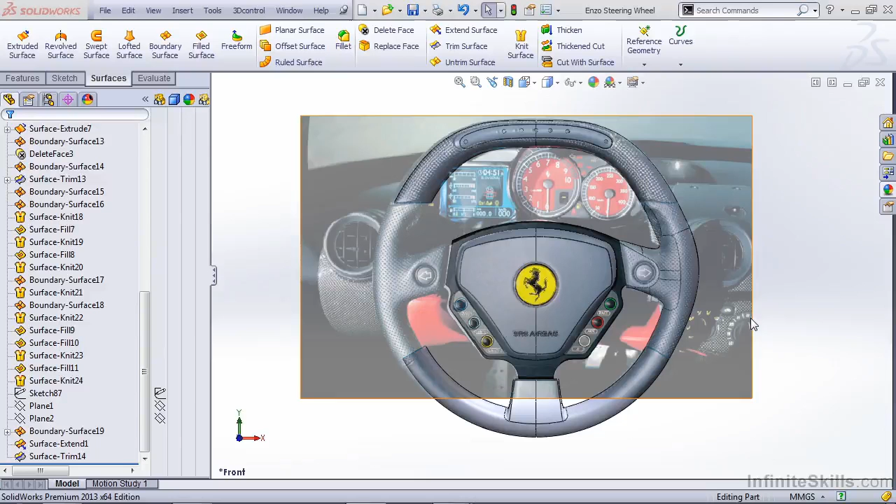In this lesson, we're going to focus on creating the turn signal button on our steering wheel. Now, in reality, the button would be a separate part and it would be integrated into the steering wheel. For the purposes of this video, we're just looking at how to create the geometry.

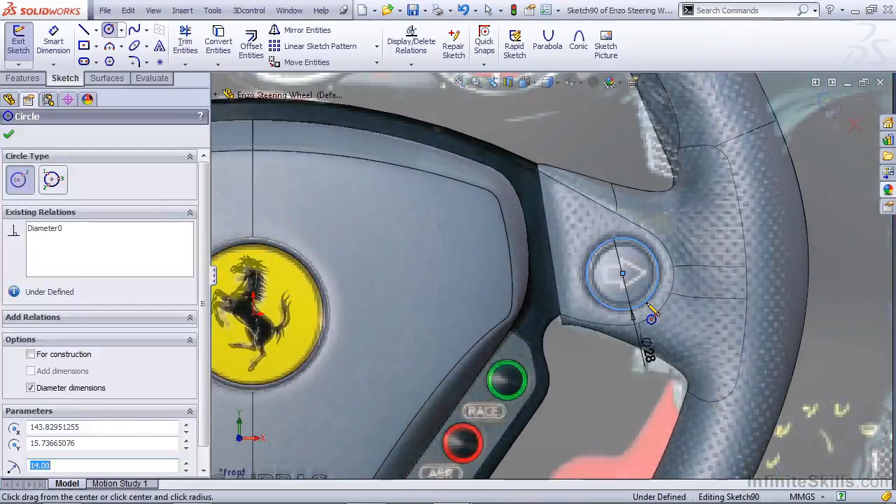So I'm going to start by creating a sketch on the front plane. I want to create a circle for our steering wheel button. In this case, it looks like 28 millimeters. That'll be about right. We'll want to drag it to be roughly in place. Then I'm going to fix its center point.

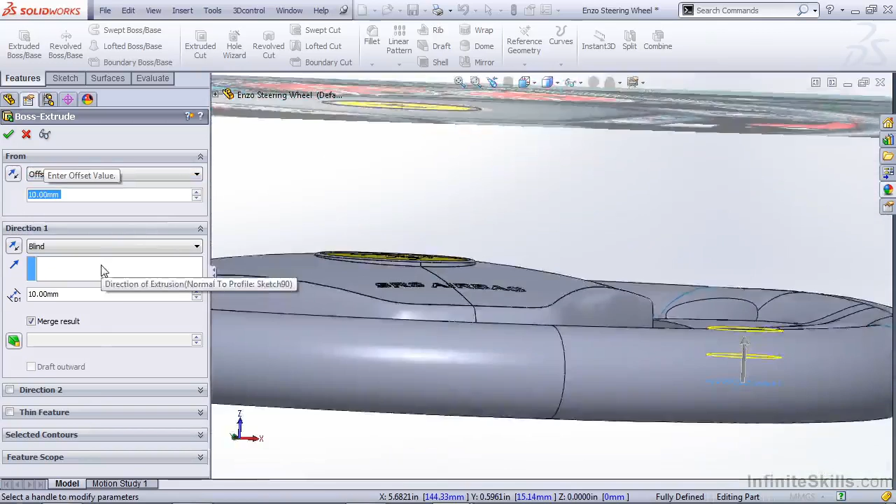Now I want to extrude that on the Features tab as a solid extrude. We're going to use the From drop-down box to offset this. Let's offset it 10 millimeters. And for the blind in direction 1, we're going to keep it at 10 millimeters. We want to deselect Merge Results because we don't want it merged with any other solids in the part, and

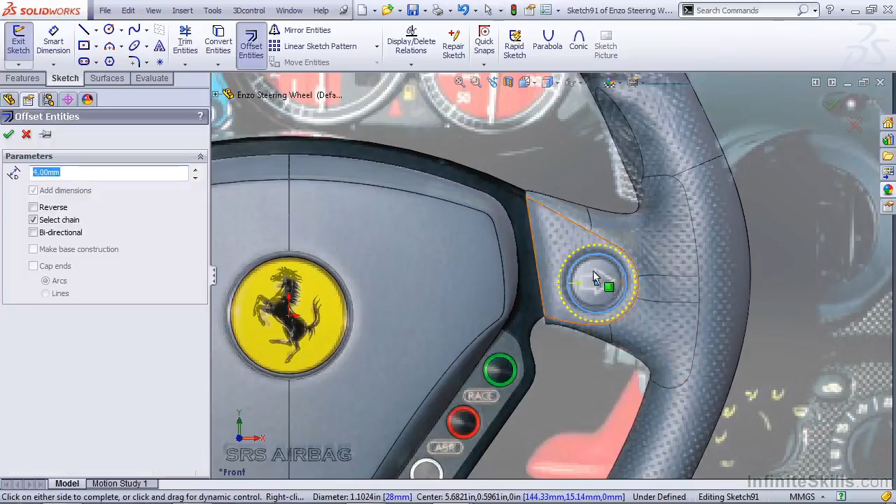hit OK. Now again on the front plane, we're going to create another sketch, but we're going to show the sketch from our recent Boss Extrude. We're going to select its edge. We're going to do an offset. In this case, let's try 4 millimeters. What we're trying to do here is get the shadowed offset to match the sketch picture.

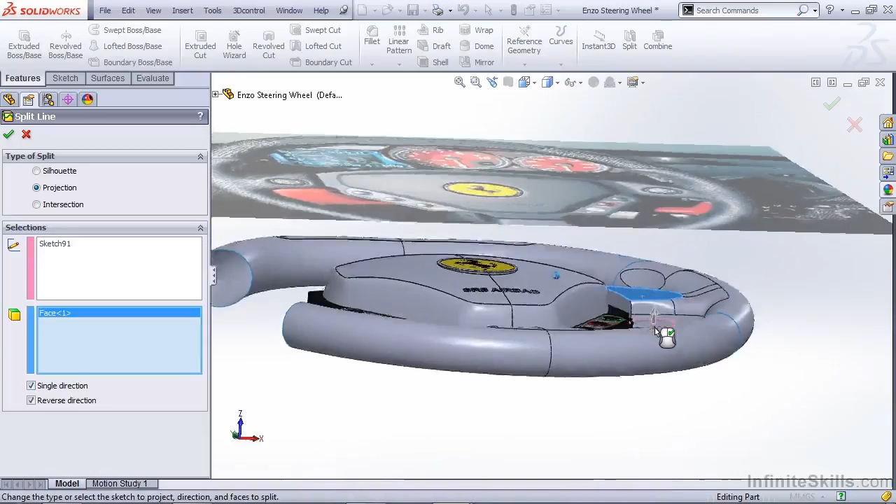Once we hit OK, we can exit this sketch, and now we want to use the Curves drop-down split line option. I'm going to project it onto this face. We're going to use the single direction option, making sure that the arrow is pointing the right direction. If we don't, it's going to split the back face as well. Once we hit OK, notice that we have a split line on our new front face.

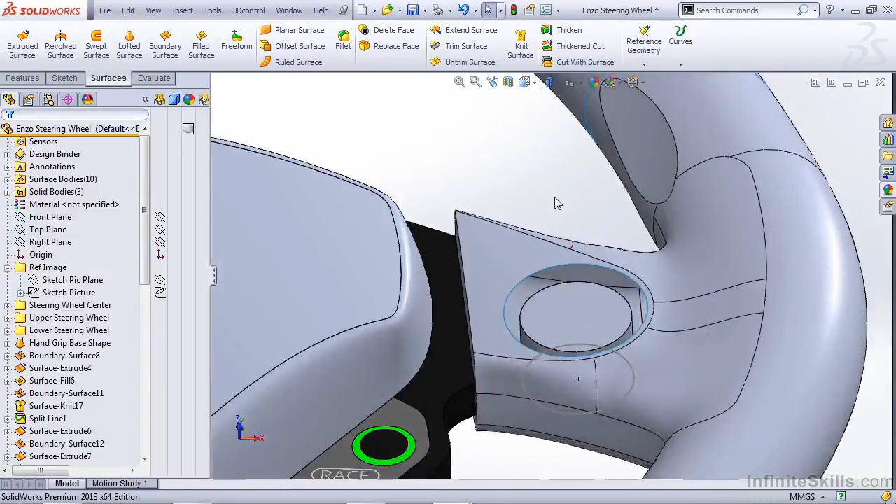I'm going to go ahead and hide our sketch picture, go to our Surfaces tab, and use the Delete Face option. We're going to remove this face, and we should be able to notice that we have our solid Boss Extrude below it. We can go ahead and hide the sketch for our Boss Extrude and create a boundary surface.

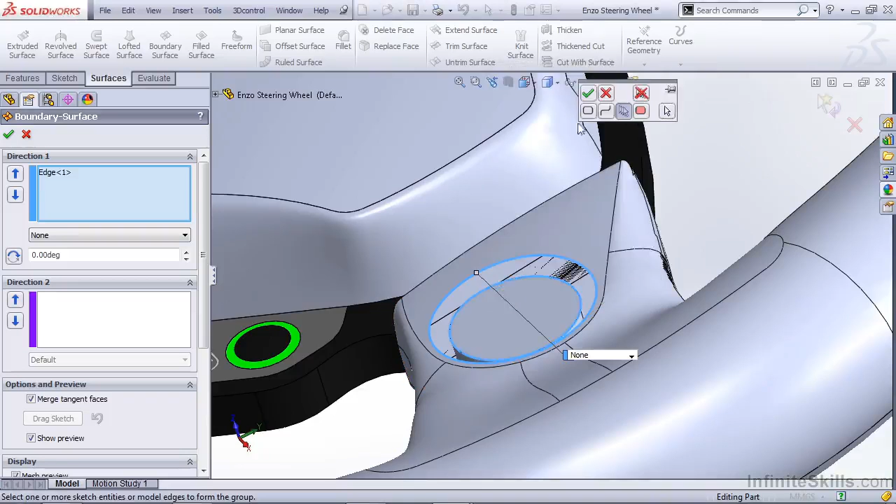We're going to be going from our open edge from our deleted face down to the front face of our Boss Extrude. Now notice when I try to select this, it's actually selecting the face behind it. So you have to be real careful with your selection. I'm going to right click and open my selection manager and make sure that I select the appropriate edge and hit OK. And now what I want to do is apply a tangency to our extruded face edge.

I'm going to apply an equal curvature relation to our edge on our surface. The reason I apply a curvature relation to one and a tangency to the other is based on the geometry we're working with. The extruded boss only has a flat face, which means there's no curvature. Applying a tangency relation to the edge is going to give us just as good a result as applying the

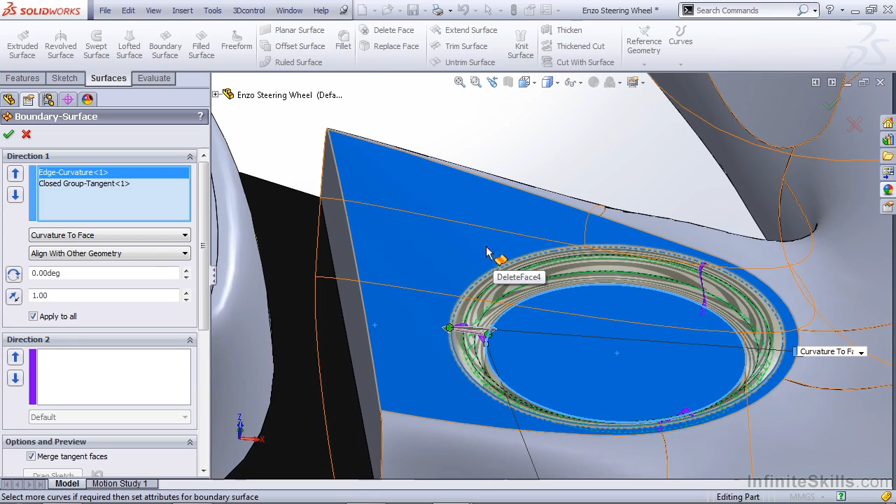curvature relation. However, when we're dealing with the surface, we have a lot of curvature in the surface, so we want to make sure that we have a smooth transition going from that surface down to the Boss Extrude face. We can hit OK and take a look at the result.

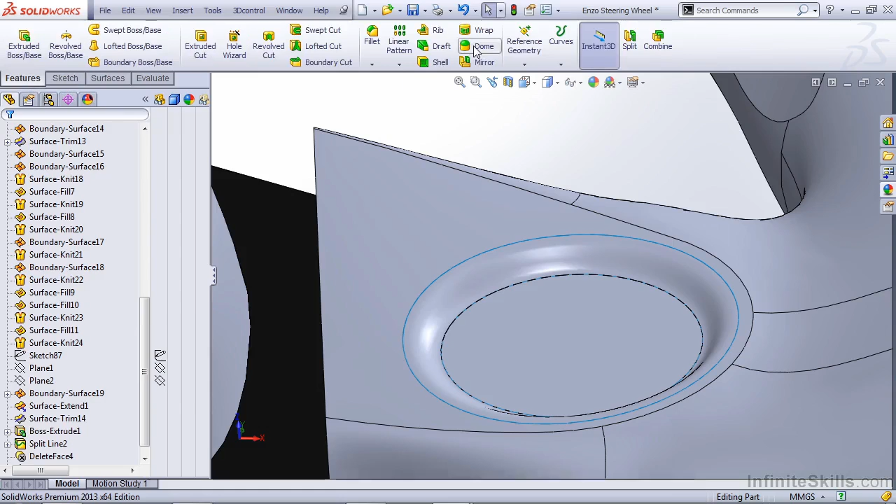The next thing we need to do is actually create the domed section to represent our button. So I'm going to go back to the Features tab, and I'm going to use the Dome option. The Dome option will let me select the front face of our Boss Extrude. I can reduce this, say roughly 2 millimeters, and hit OK. Now remember, this is still a solid part, but all the surrounding geometry is surfaces.

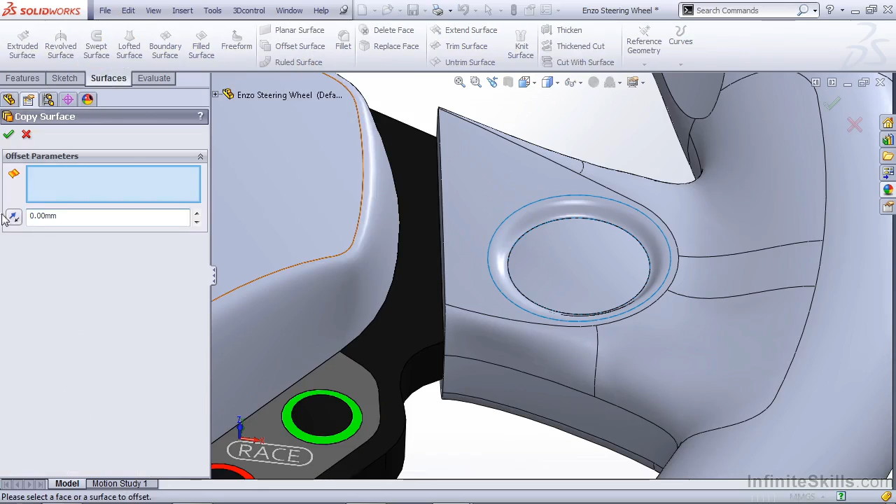So back on our Surfaces tab, we're going to use Offset, change the dimension to 0, and select that domed face. Now if we go to our Solid Bodies drop-down, we can hide our dome, but notice that we still have that offset surface. So now we can knit the offset dome, the blend that we created, and the original steering wheel surfaces we're dealing with. Now everything is combined together.

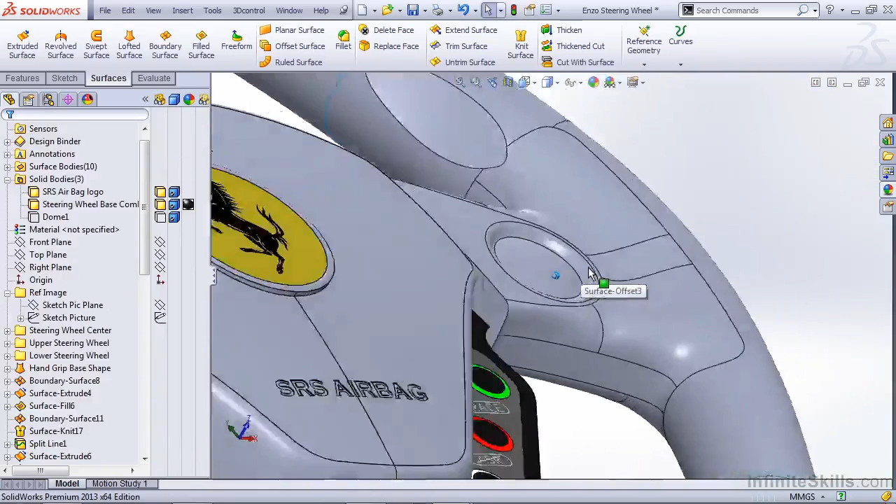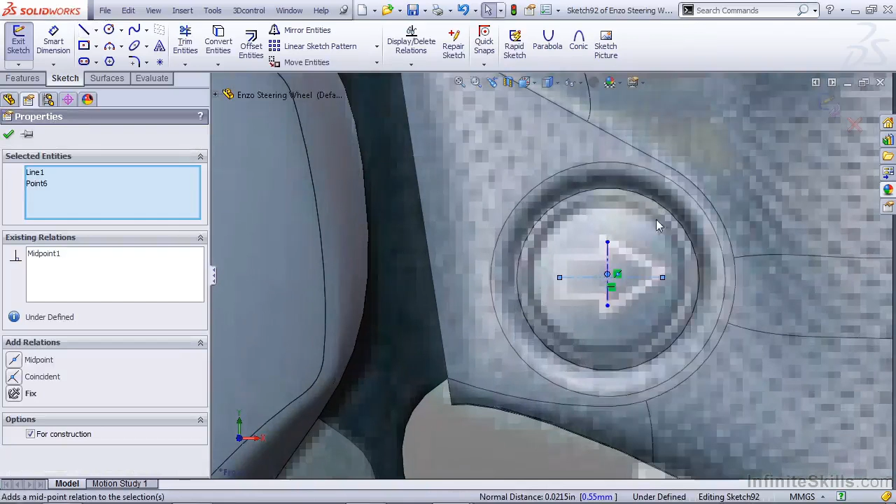The next thing we need to do is actually create the arrow. So for this, I'm going to turn our reference image back on, start another sketch on our front plane, and create this arrow. For this, I'm going to use a few reference lines for construction. And I want to make sure that the midpoints of these lines intersect. Next, I'm going to use the line tool. I'm simply going to draw up over to this line, snap to the endpoint, snap to that end.

Now we can use the mirror tool to mirror these entities about our horizontal reference line. Once we've done that, we want to use the offset option. We want to offset this 1 millimeter, making sure that we do not make base construction and we do not do bidirectional offset.

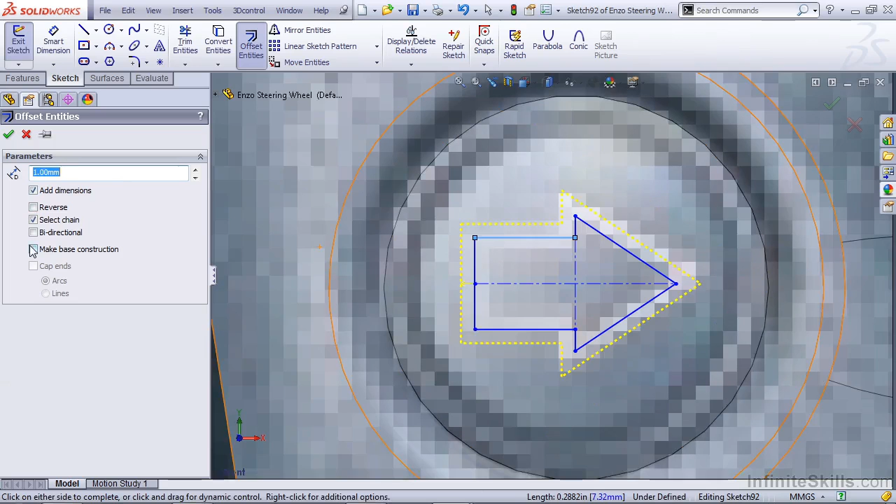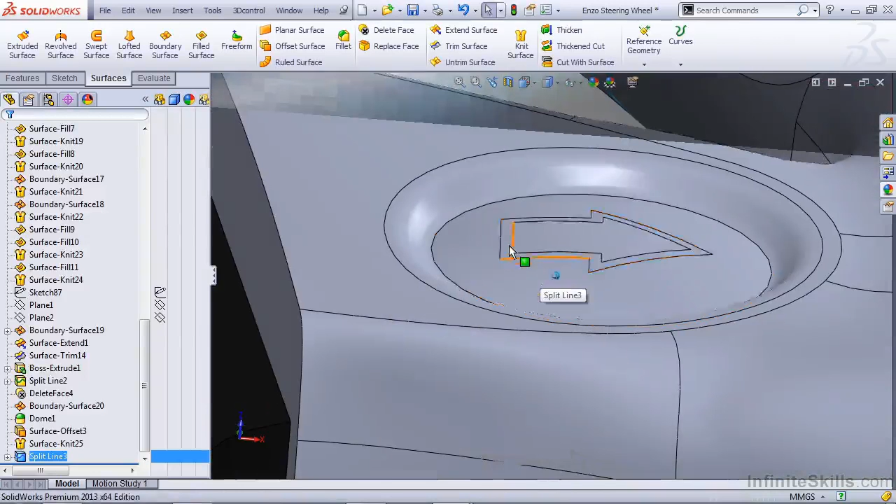Once we hit OK, now we can use this sketch with our Curves drop-down split line and split the domed offset surface. Now again, we want to make sure we choose single direction and that we're only going the direction of this surface. Once we hit OK, you can see now we have a separate section on this dome for our arrow.

This will come into play later when we start applying materials, and we can give this a white material so that it's distinct from the surrounding geometry. That concludes making the turn signal button on our steering wheel.